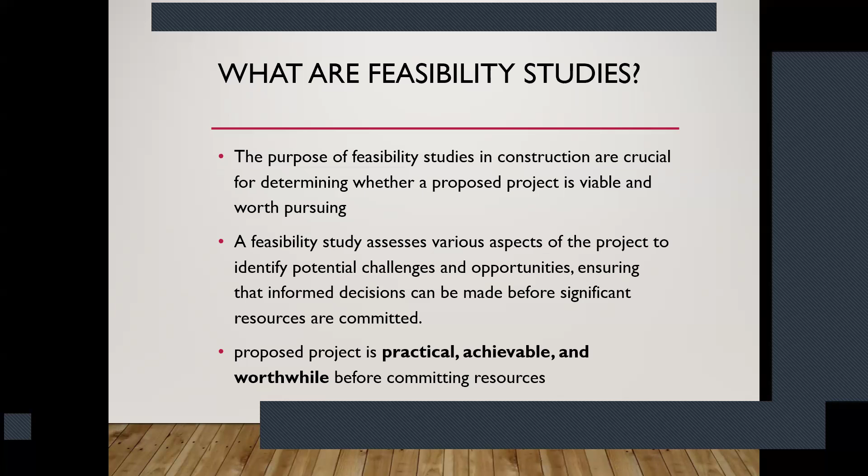So these are the purposes of doing a feasibility study: to reduce risk. There are so many risks - risk analysis is another part of the project topic - financial risk, time risk, material risk, and likewise operation risk. There are so many risks, but by doing the feasibility study you can reduce the risk.

It saves time and money, because if you do a proper feasibility study, you can take necessary action to prevent unnecessary delays. You can take precautions to avoid unnecessary reworks. So it saves time and money.

For example, if you do a proper technical analysis on the ground - a soil test - before building a big structure, and it shows the soil or rock is not good, you can't design a high-rise building in that area. You can still build it, but you need a solid foundation, and the foundation cost is much higher. So you have to be ready for that. If you have limited funds and go ahead with a high-rise building without budgeting for the foundation, with a pile foundation, you can't complete the project.

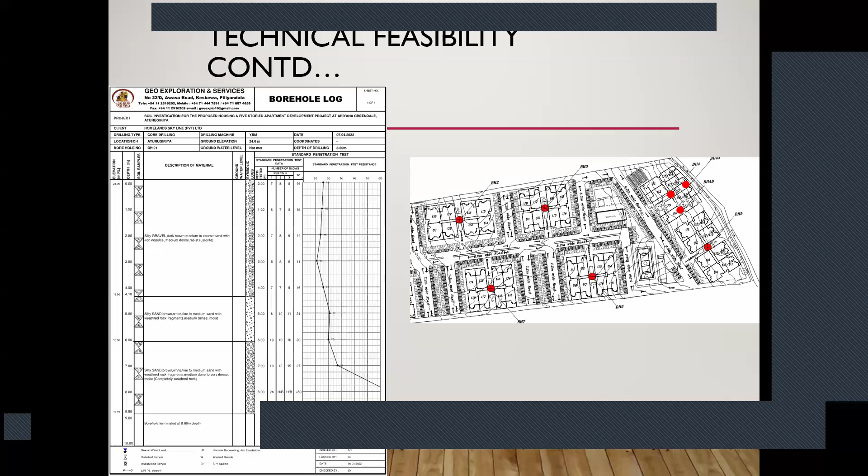To do that, you have to do the technical feasibilities: soil test, ground condition, water table test. Likewise, you have to do it. So technical feasibility, design consideration evaluating the architectural and engineering aspects, including structural integrity, design compatibility, and potential construction methods.

Also resource availability, analyzing the availability of material, labor, and equipment required for the project. For example, when doing the port city project, if the government of Sri Lanka said Sri Lankan contractors should do the port city, it's impossible. They have to go to foreign, experienced contractors, because we don't have the equipment. Likewise, that resource availability is also important.

Technically, you have to identify whether anyone is involved in the project tendering process of your company, not for construction. Other one, maybe for purchasing printers or stationery. Anyone is involved.

So, what kind of area are you involved in, Kalyan? I'm an assistant director of planning, so I'm involved in some small construction projects, as well as purchasing equipment or project materials, machineries, for livelihood development programs, likewise.

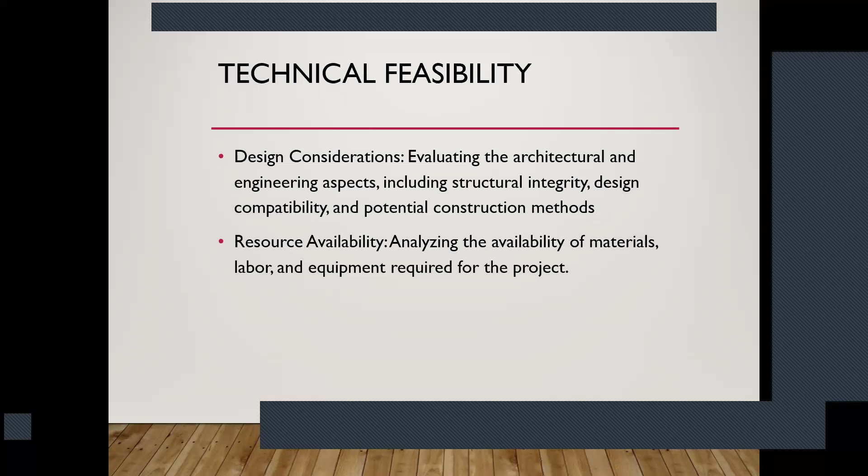Yes, sir. So economic feasibility - earlier someone asked about cost estimation. Economic feasibility is one of the things most private developers are looking at. Cost estimation: estimating total project cost, including land acquisition, construction equipment, and contingency expenses.

Financial analysis: assessing funding options, cash flow projections, and potential profitability. Because now, for example, most apartment developers depend on pre-sales. That is one of the worst cases we are having. If you have a good client base, you are okay. But if your client base is not good, or you don't have much relationships to sell the apartment, your cash flow may get stuck.

And also it's important to do the market analysis - this is the most important: evaluating the market demand for the project's intended use, such as residential, commercial, or industrial purpose.

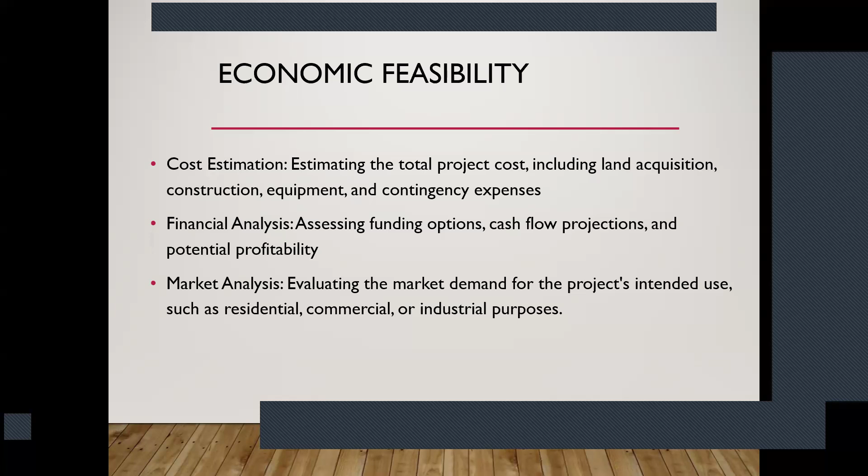And the legal and regulatory feasibility: zoning and land use. Reviewing the zoning laws and land use regulations to ensure the project complies with the local requirements.

As I said, recently some municipal councils are gazetted under the Urban Development Authority. Under that, some projects, like indoor stadiums, were earlier allowed especially in Colombo and the Dehiwala-Galkissa Municipal Council area in commercial sites, but they are not allowing them in residential areas. They also put a clause requiring a minimum land area of 40 perches.

Likewise, a lot of regulation came in, so when you are doing projects, it's more important to identify those things. And permits and approvals: identify the necessary permits and approvals required from government authorities and regulatory bodies.

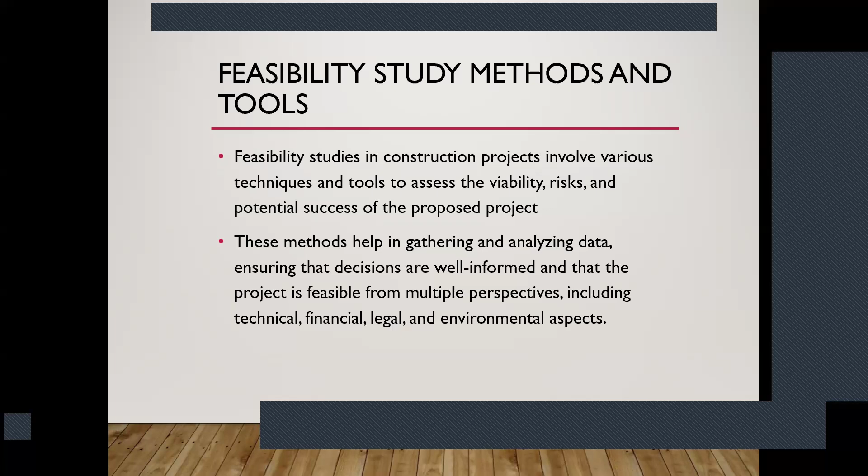SWOT analysis is a basic and very popular one: strengths, weaknesses, opportunities, and threats. This analysis is a strategic planning tool used to identify the internal and external factors that can affect the project. It helps in understanding the project's potential advantages, strengths, and opportunities, as well as challenges, weaknesses, and threats. Advantages can be categorized as strengths and opportunities, and challenges as weaknesses and threats.

For example, in SWOT analysis, when you are getting a project, say medical equipment, you are planning to have medical equipment, say you are trying to do sanitizer manufacturing or mask manufacturing. What is the strength and opportunity? What are the potential advantages? During COVID time, it's a huge advantage.

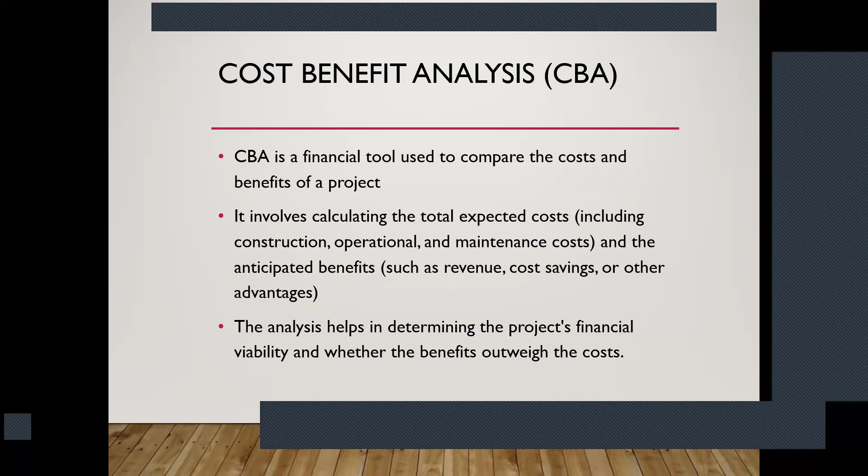The break-even analysis. Simple thing - say someone is doing block manufacturing. Within 1 or 2 years, the machine is usable, can be used for 2 or 3 years. Then you have to see whether with that fixed cost and operation cost, when the feasibility breaks even with the cost.

A lot of factories like Hayleys, Haycarb, they are always very concerned about this break-even analysis. They identify at which point of units their cost is equal to the income.

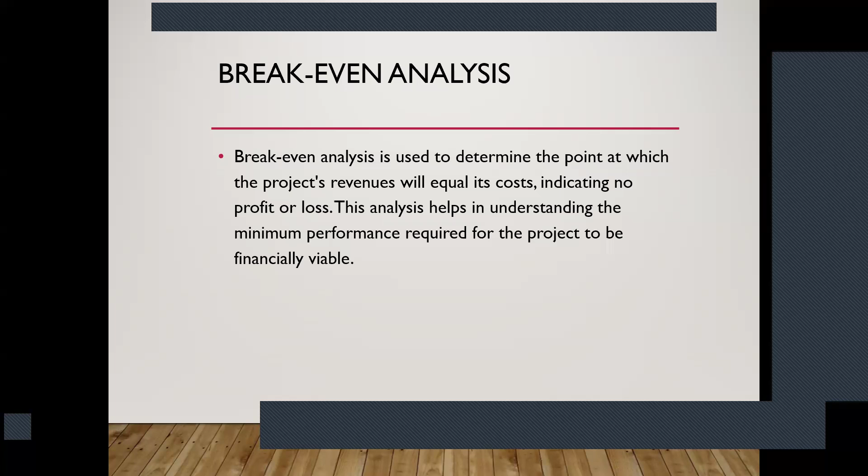Also environment impact assessment. This is a compulsory requirement for massive big projects, but it's also a tool, because sometimes regulations say you have to do the EIA, TIA, whatever. TIA is traffic impact assessment, EIA is environment impact assessment. EIA is a process to evaluate the environment consequence of a construction project. It includes assessing potential impacts on air and water quality, wildlife habitats, and local communities.

As I said, I worked on one indoor sport project. After 10 o'clock they can't operate the indoor cricket stadium because the community can get an injunction from the court if the sound is too high. The neighbors can't live there, they can't sleep, children can't study. So it's important to do the environment impact assessment, especially for large projects.

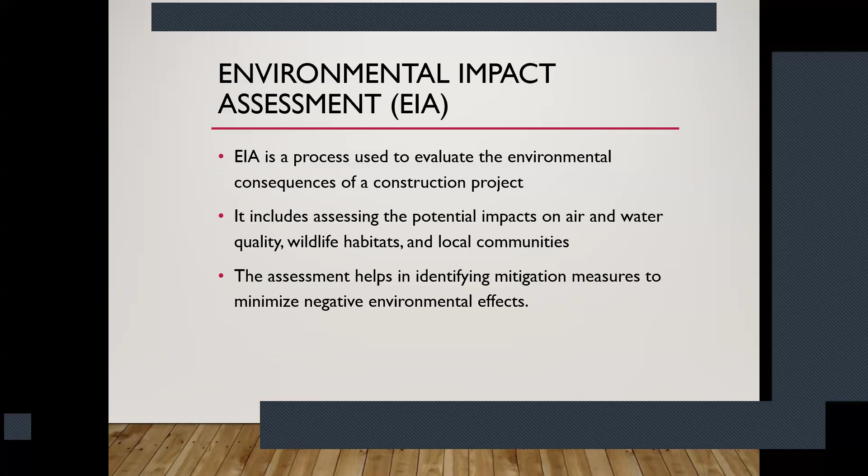So, importance of design in construction. The design phase in a construction project is critical as it sets the foundation for all subsequent stages of the project. Good design not only impacts the functionality and aesthetic of the finished structure, but also influences project efficiency, sustainability, safety, and cost effectiveness.

So good design - normally people say good design is aesthetics and functionality. But sometimes when you are doing the design, you have to think about constructability. It will give advantage to the contractor not to delay the project. Sustainability - you can think about the sustainability of the project. Safety - at the design stage you have to think about safety during construction and during operation.

In the Lotus Tower, it's aesthetically very beautiful. Someone at the top, in the viewing deck, without a safety net - very attractive, you can see directly outside. But after that suicide issue - not suicide, a girl jumped from the tower - after that they covered it. That's a functionality problem, so they had to cover it. Then it's not aesthetically as good, but you have to do it.

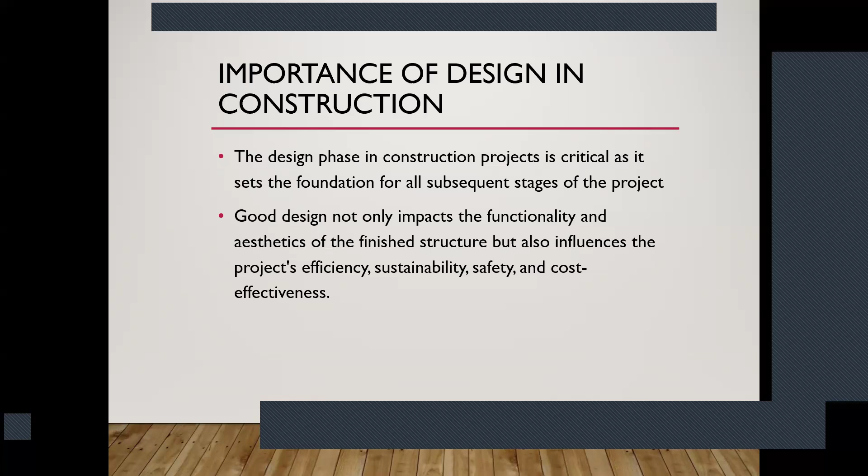It's also very important to engage the stakeholders, the right stakeholder at the right time. It will give you the advantage to succeed with the project very smoothly. Engaging stakeholders in the design process is crucial for ensuring the project meets the needs and expectations of all parties.

Who are the design stakeholders in the project? Can anyone tell? I mentioned this in the previous slide as well. Clients - design stakeholders, the architects, engineers, like that. Right, very good. Architect, QS, structural engineers, contract administrators, like that.

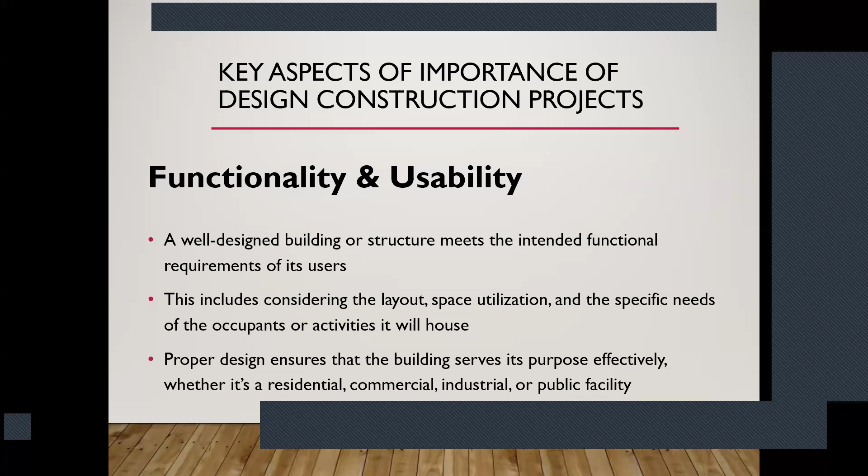Aesthetic and visual appeal - design plays a critical role in the visual appeal of a construction project. Aesthetic considerations can enhance the attractiveness of a building, contributing to its market value and the overall experience of its users. Good design balances aesthetic qualities with functionality, creating spaces that are both beautiful and practical.

The Lotus Tower is very aesthetically attractive, so that's also important. But if you look at the World Trade Center, it's not attractive. The Altair Tower, though, is a good design - aesthetically it's very good, a new design, very attractive. Also, the spaces are used very importantly - all the balconies are used as attractive balconies.

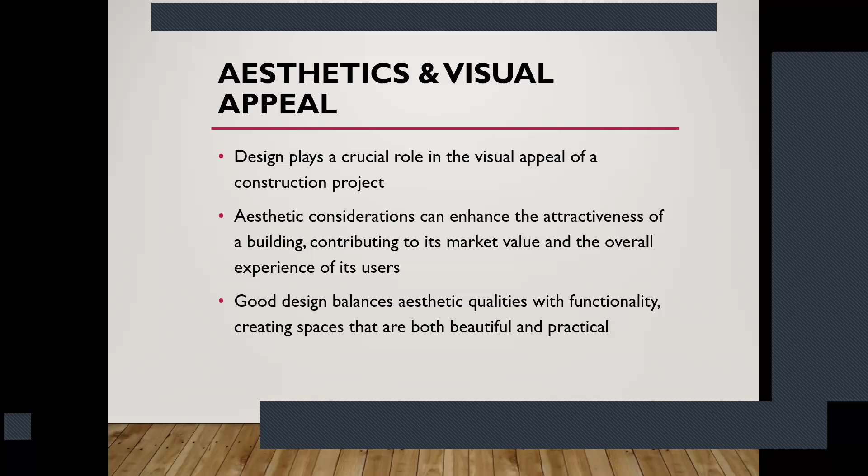The other important thing is cost efficiency and budget management. Effective design can significantly impact the cost effectiveness of a construction project. If you don't have a proper design, you don't know where you'll end up with the cost. So you always have to have a proper design and freeze the design to manage the cost.

This is done by optimizing use of material and simplifying the construction process. As structural engineers, we always think about using reinforcement bars in 6-meter and 12-meter lengths because those are freely available in the market. So we try to always minimize wastage - architects always do tile layouts to minimize wastage. It saves money for the country and the client, and also saves time.

It also aids accurate cost estimation and financial planning.

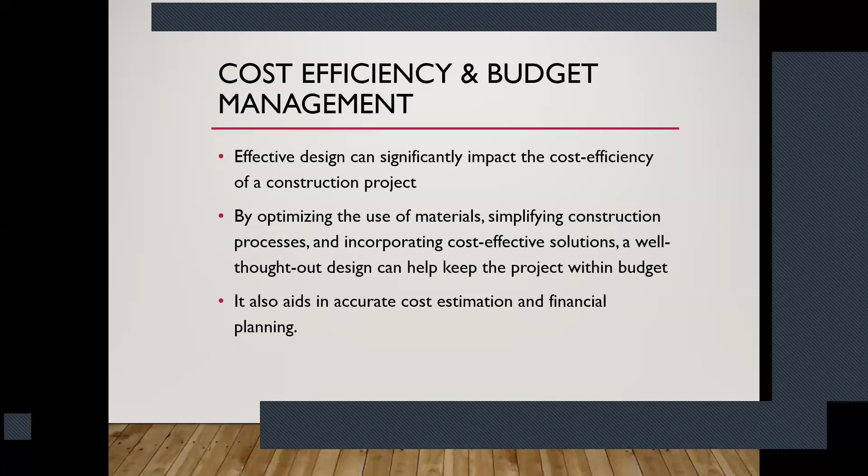Another important part is sustainability and environmental impact. Design decisions influence the environmental impact of a construction project. Another project we recently did was the mini hydro project in Denia - we call it Cosmo. There are a lot of environmental effects there - we are disturbing the stream, disturbing wild animals, so we have to address these issues.

Design decisions influence the environmental impact of a construction project. For example, if you want to put a bridge, or take the same mini hydro example - the channel takes water from the weir to the turbines, so you have to construct a channel. If you construct it by cutting the river bank, it's not environmentally friendly. It's better to go for piers and put the channel on top of them.

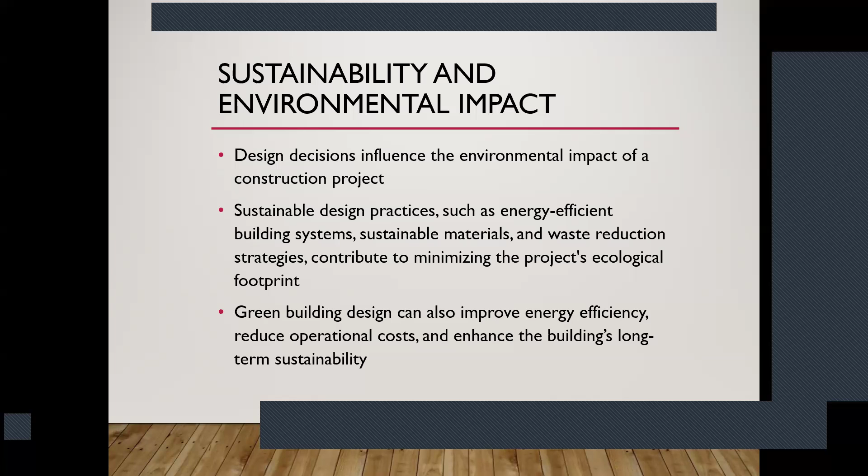And the safety and compliance... I don't have much experience on that, sir. That's why I didn't answer.

So, safety and compliance - safety is a critical concern of construction projects. As I said, the Lotus Tower now has implemented a special mesh to cover the observation deck so no one can jump. But the aesthetical look, you have to tolerate that.

Good design ensures that the building complies with all relevant safety standards and regulations, including fire safety, structural integrity, and accessibility. Fire staircases have a minimum width because in a large fire you need an escape route, so the width has to be sufficient.

Good design has to address these things. For fire staircases, you can't use slippery tiles, because at that time people are moving, people are running. So you have to understand and identify those critical cases.

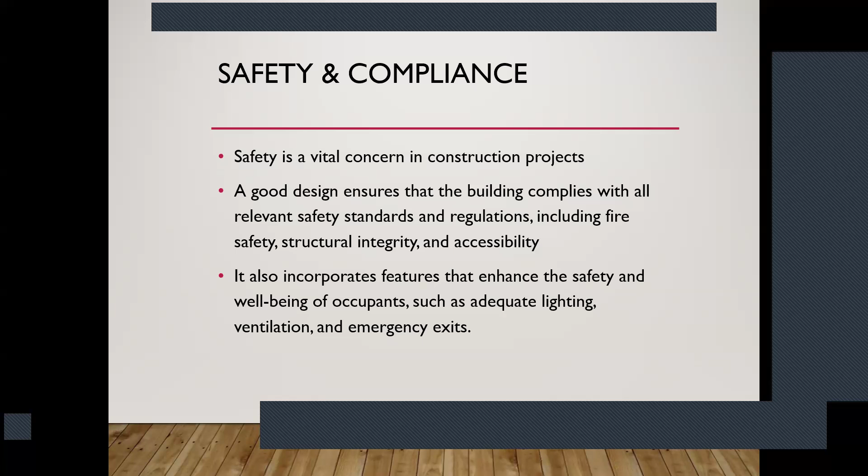Adaptability and flexibility - design can influence a building's adaptability to future needs and changes. As I said, from 2015 to 2018 a lot of people built office buildings. Now you have to change it, sometimes into a restaurant, an open restaurant, like that. That adaptability should be there for the building.

Flexible design allows modification and expansion without requiring expensive structural changes. You can't do major structural changes, but you can do HVAC and lighting changes, and use the building for another purpose. There will be a cost, but not a huge cost.

This adaptability is particularly important in sectors where technological advancements or changing user needs may require updates or reorganization of the space.

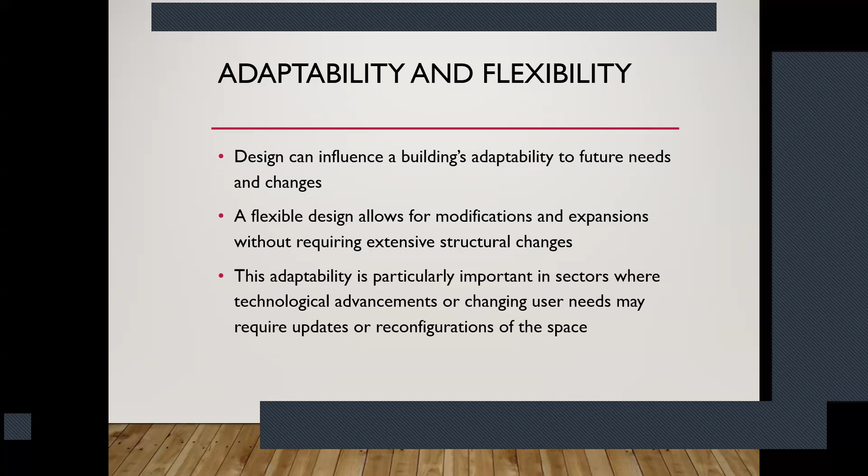Innovation and technological integration - the design phase is an opportunity to integrate innovative technologies and materials into the project. This could include smart building technologies, advanced construction techniques, or sustainable materials that improve performance and efficiency.

For example, if you are doing a high-rise building facade using glass, you have to use high-quality low-E glass to reduce energy consumption. Likewise, innovations have to be introduced to the project.

In summary, designing is fundamental to the construction project and influences every stage and outcome. It impacts the project's functionality, aesthetics, cost, sustainability, safety, and marketability. A well-executed design process ensures that the project meets objectives, satisfies stakeholders, and delivers value over the long term.

Any question from you?

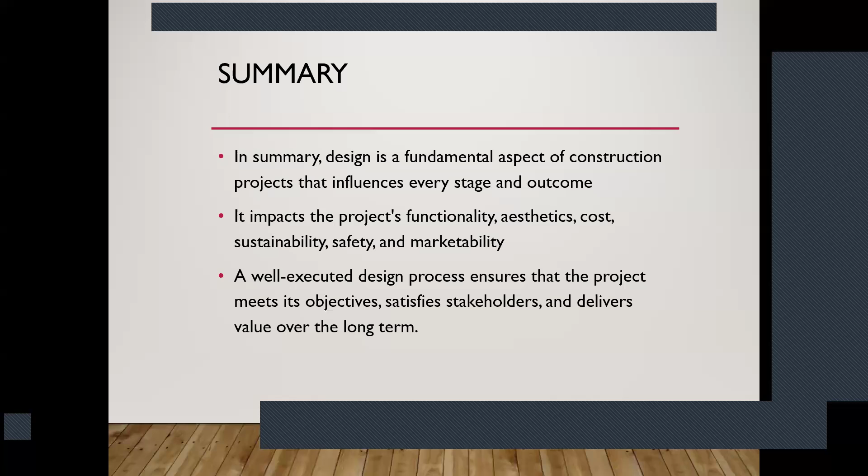Good, so estimation - definition and purpose. Estimation in construction projects refers to the process of predicting cost, resources, time, and material required to complete the construction project.

Nowadays, engineering estimation is one of the key parts to identify the project cost. Clients always ask for engineering estimates, but clients are always thinking about the cost.

But when you are coming to it as a good estimator or a good engineer, you need to think about the materials to do that, and also suppliers, and also the durability of things, and also machineries - whether the machineries are available, is it possible to do likewise.

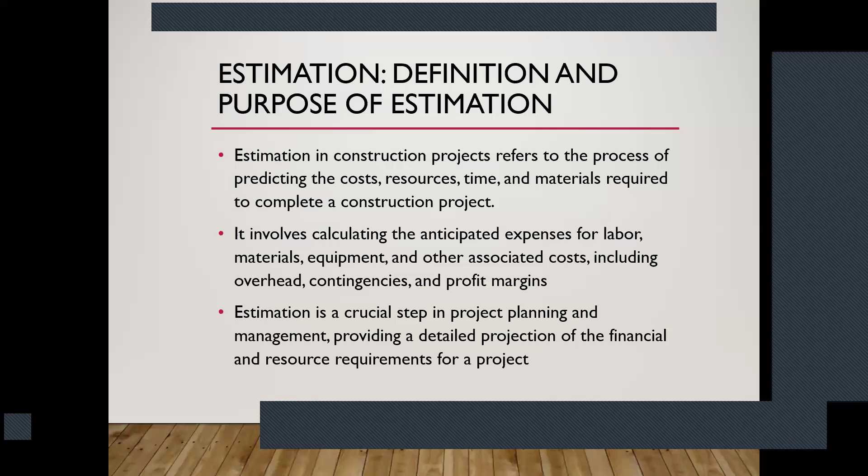The purpose of estimation.

Estimation helps in creating an accurate project budget, which is essential for financial planning and securing funding. It provides a clear picture of the total expected cost, allowing stakeholders to allocate financial resources effectively and plan for cash flow needs throughout the project's life cycle.

So you have to have a more accurate estimation, because sometimes when you are preparing the budget for the project, you budget it for 100 million, but the actual cost is much more, 125 or 130. Once the project is going on, you realize the cost will go up. Then the investor, who has only 80 million and is getting another 20 million back, can manage with 100 million but can't manage with 120 million. Without that last 20 million, the project will wreck.

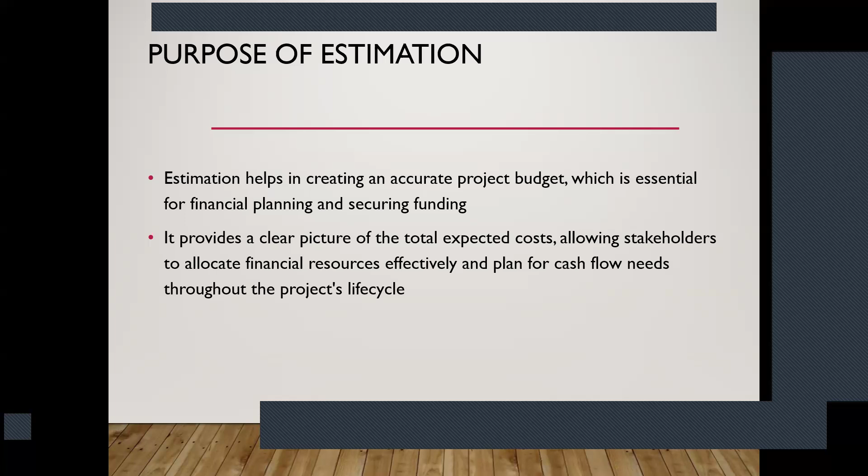Bid preparation and tendering: for contractors, estimation is critical in preparing bids for construction projects. A detailed and accurate estimate enables the contractor to submit a competitive and realistic bid, outlining the costs associated with labor, material, equipment, and overheads. This helps in winning contracts and negotiating terms with clients.

For contractors, estimation matters because to win the project you have to estimate properly with proper margins. For government projects, people involved know how many bidders are bidding for these things, so you need a proper cost estimate. If you make a mistake, you will lose the project. But sometimes, in a negative way, you may make a mistake and still win the project, but then you can't perform.

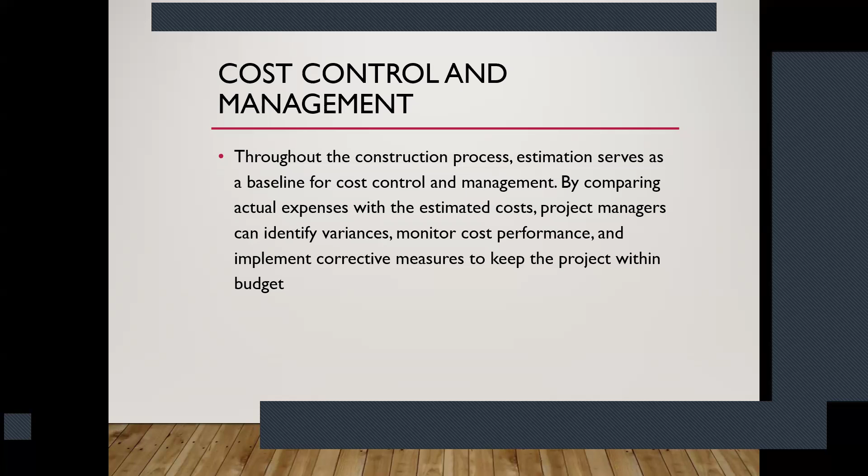Resource allocation and planning: normally planning engineers handle cost controlling, resource allocating, and planning. For example, in a small 5-house project, you have to compact the soil and manage that compactor — you can't buy 5 compactors, you have to rotate and manage it.

As with the compactor machine, you have to plan and estimate hiring rates, or share with other projects so the cost is shared — you don't need to allocate new work, just allocate the sharing cost. This information is crucial for scheduling and resource planning, ensuring necessary resources are available at the right time and in the right quantities.

For example, for a 100 cubic meter slab, you need 400 cement bags. If you're planning to concrete next Wednesday, you need the cement delivered within next week — you don't need it a month ago. So you need the material at the right time.

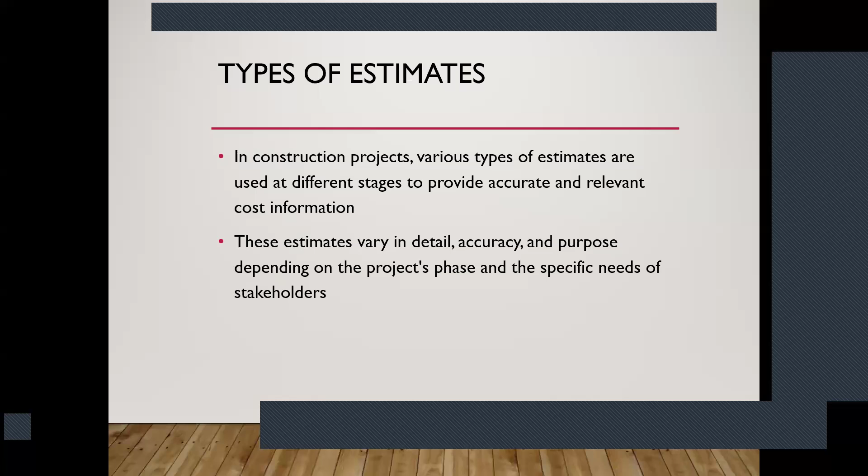Preliminary estimate, also known as rough order of magnitude (ROM) estimate, or conceptual estimate. For example, if you are going to build a steel building, we ask what is the construction cost per square foot? For the preliminary estimate, we say 10,000 rupees per square foot for a normal steel house with minimum side, without side opening. So then we know what is the project cost. If we have 100,000 square feet, we multiply it and see this will be the project cost. And also we add another 20% for other infrastructure or modifications.

So rough calculation estimate is more important before getting the decision of the project - to provide an initial cost estimate early in the project life cycle, often before detailed design or scope is fully developed, and to determine project feasibility and help make decisions on whether to proceed with further development.

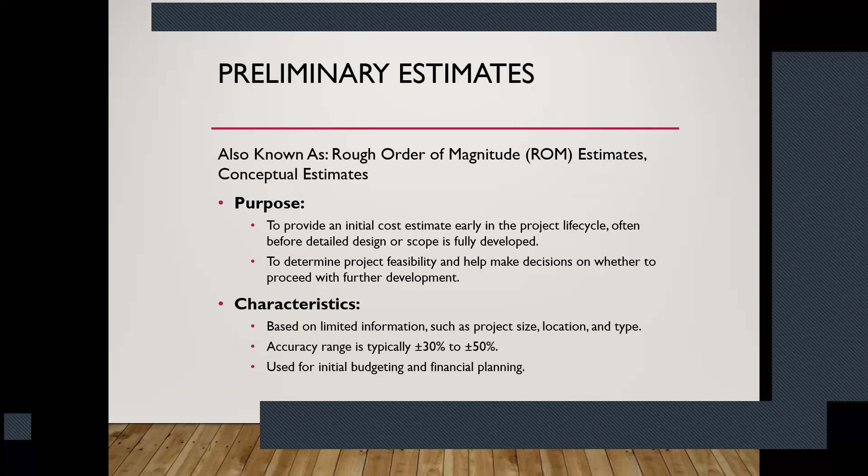Characteristics: based on limited information such as project size, location, and type, accuracy range is typically 30 to 50%, because you don't have enough information - you are doing a rough calculation. Used for initial budgeting and financial planning. This is only for initial things.

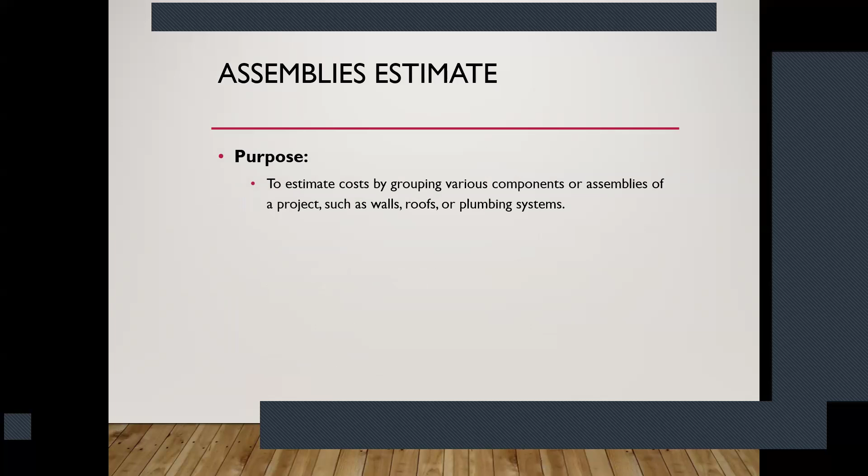So, assemblies estimate - the purpose is to estimate cost by grouping various components, assemblies of the project such as walls, roofs, plumbing system. Characteristics: more detailed than preliminary estimates, but still based on general assumptions. For example, for the building project I mentioned, we estimate piling at 30 million,

More detailed than the preliminary estimate. As I said, preliminary estimate just says steel building 10,000 per square foot. But here, piling this much, steel structure this much - like that you get details, in small segments, useful for comparing different design options or systems. Accuracy range is typically 20% to 30%, earlier it was 30% to 50%, now it's reduced to 20% to 30%.

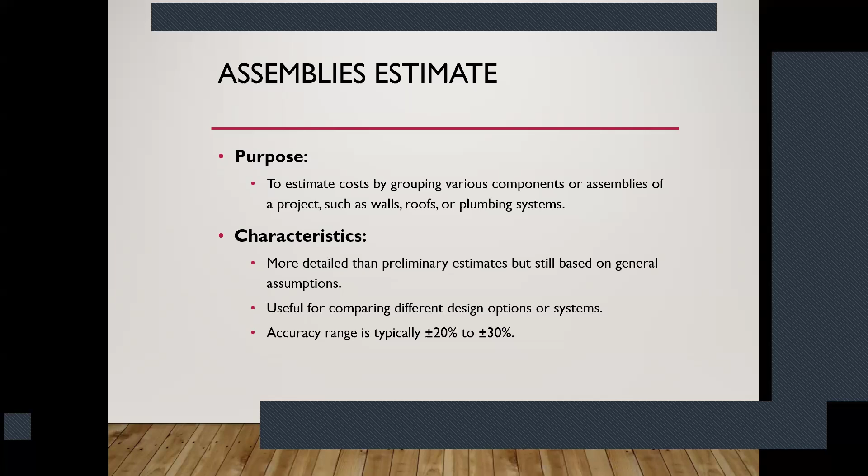Detailed estimates, also known as definitive estimates and final estimates. The purpose of the definitive estimate and final estimate is to provide a comprehensive and highly detailed cost estimate based on the complete project plan, specification, and scope of work.

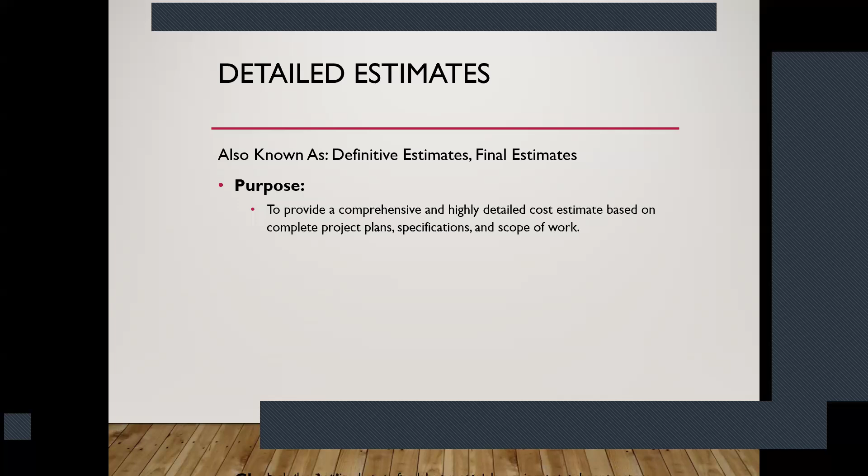Include itemized cost for labor, material, equipment and subcontractors, and overhead, required through the understanding of the project details. Accuracy range is 5% to 10%, with minimum deviations. We can use this for final budgeting as well.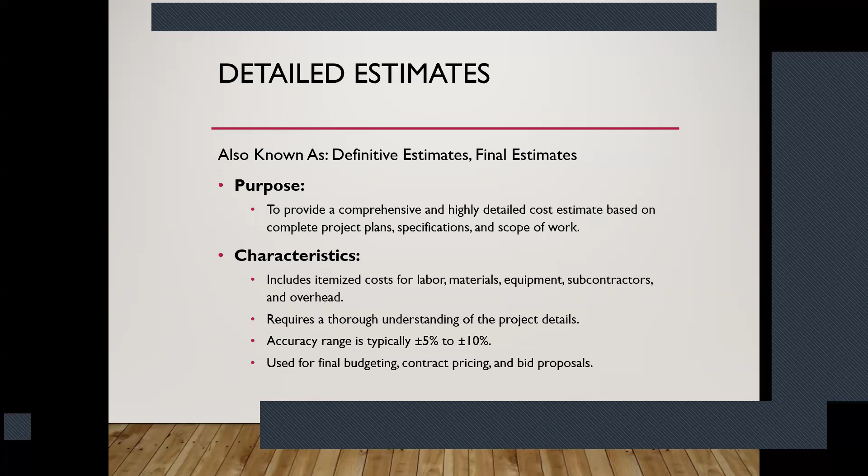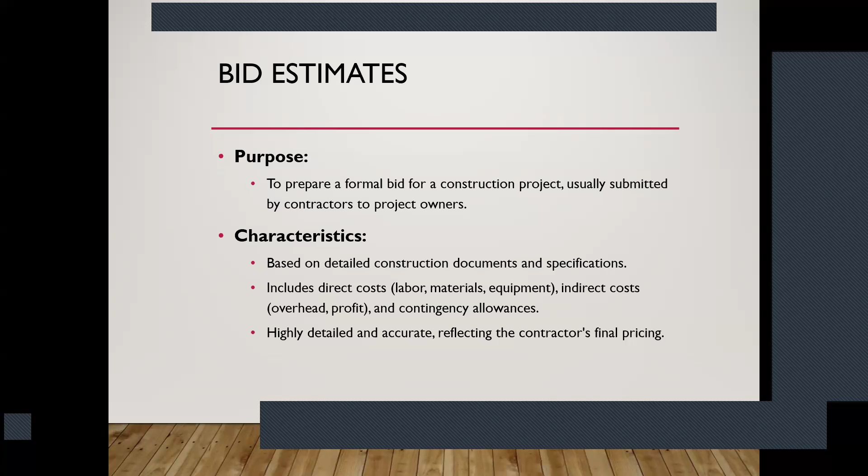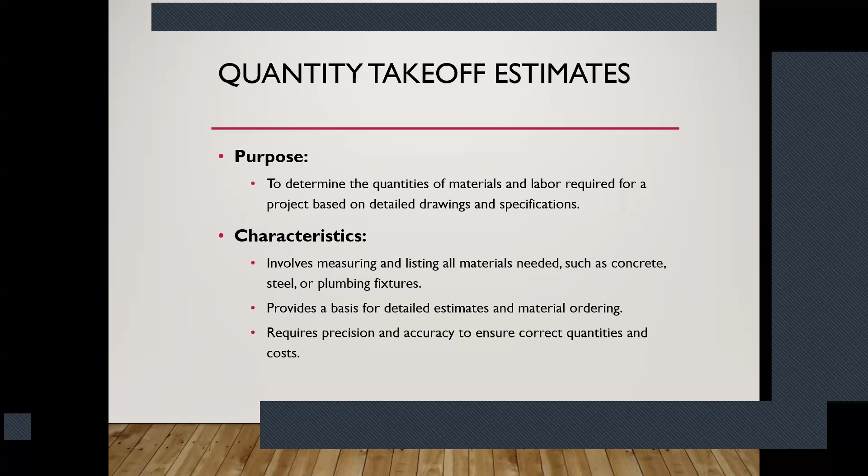Nowadays BIM is more important for procurement work. You can get all details through the BIM model. BIM is also one of the softwares to model the house, and you get the cost estimate as well, and not only cost but also material quantities. That is one of the key features of these softwares.

Has anyone worked with the BIM model?

I didn't work with BIM, but I have worked with PlanSwift software. PlanSwift, good—so how do you get the quantities? We import the drawing into the software. Good. You have to use the new technology to save your time and get more accuracy, and you have a good library, so if any inquiries come, you can go back and refer to the details. Those are the advantages.

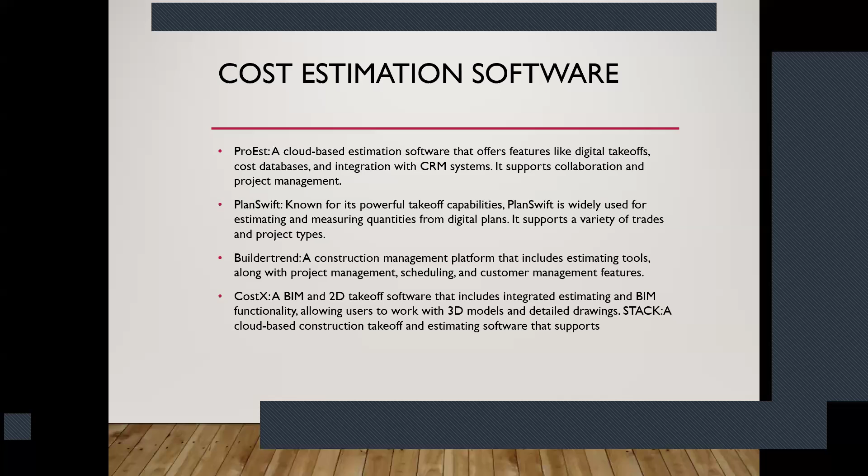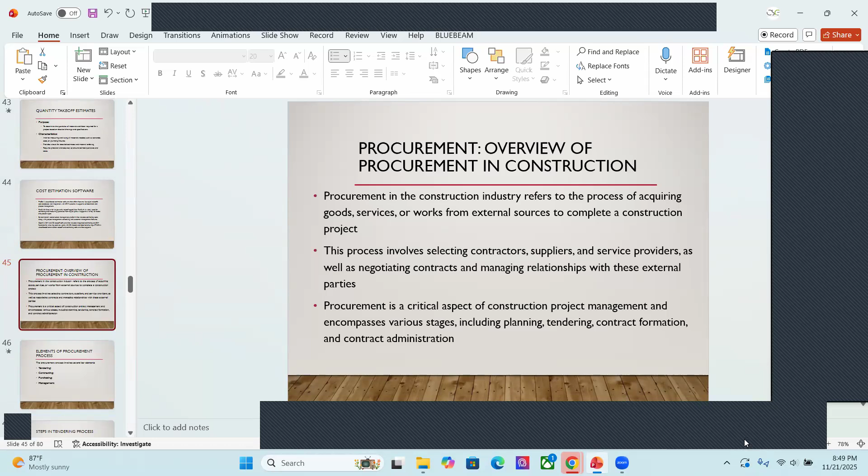This is a procurement overview of the construction. I will try to cover this part also. I have a few slides to cover this now. Anyway, I only allocated 2 classes for this, but I think I need another one—we'll try to cover it next time also.

Procurement in the construction industry refers to the process of acquiring goods, services, or works from external sources to complete the construction project. This process involves selecting contractors, suppliers, and service providers, as well as negotiating contracts and managing relationships with these external parties. Procurement is a critical aspect of construction project management and encompasses various stages, including planning, tendering, contract formation, and contract administration.

Actually, procuring for construction is a difficult part. You have to procure the designers first, then develop the project design and concept, and after that procure the contractor to do the work. Normally project managers handle a lot of this role, but especially in the government sector, procurement officers have to know about this process. These are very critical items—you have to keep reading on this, because your questions and assignments will directly relate to these aspects.